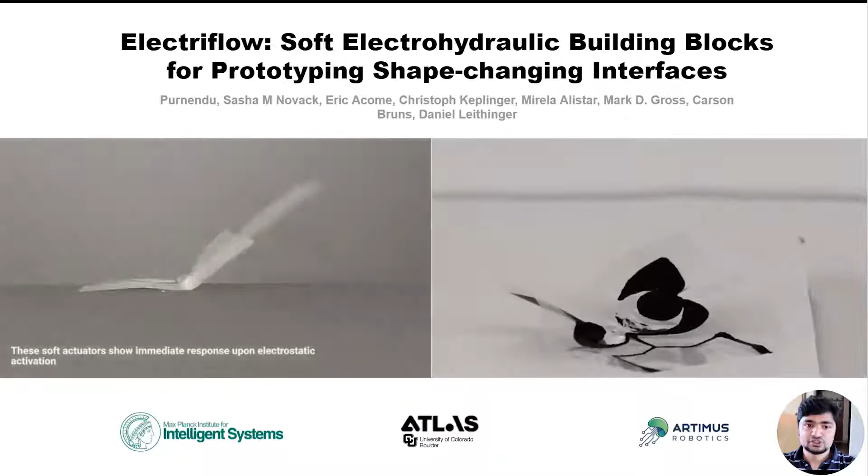Electrohydraulic mechanisms are ubiquitous in the biological world. Nature prefers electrohydraulic phenomena to drive shape change. For example, plants like Venus flytrap catch their prey through leaf closure employing electrohydraulic forces. The drastic shape transformation in certain species of octopus is a result of electrohydraulic phenomena. A pufferfish threatens a predator by filling its elastic stomach with fluid, also under electrohydraulic effects. Electrohydraulic processes drive shape change in plants and animals and augment their ability to communicate and interact.

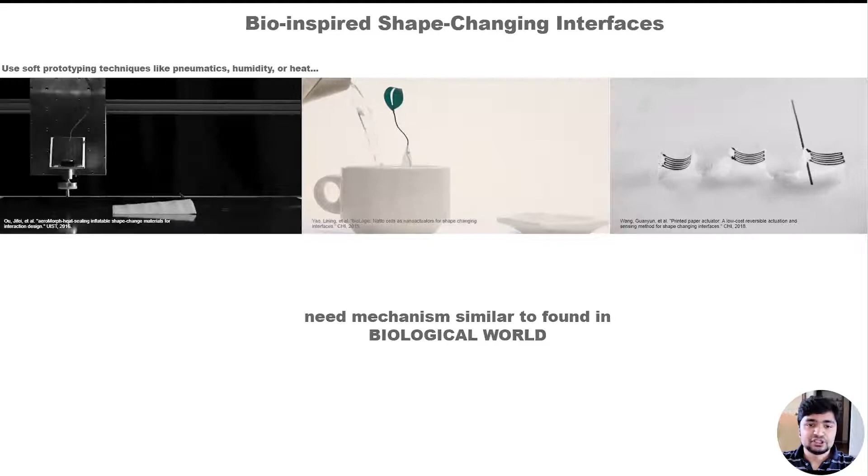In the field of human-computer interaction, taking inspiration from the natural world, bio-inspired shape-changing interfaces have been proposed. Traditionally, they are constructed out of soft prototyping techniques, which generally rely on pneumatics, humidity, or heat for actuation. But they also suffer from limitations like being bulky in terms of control system and slow in shape transformation.

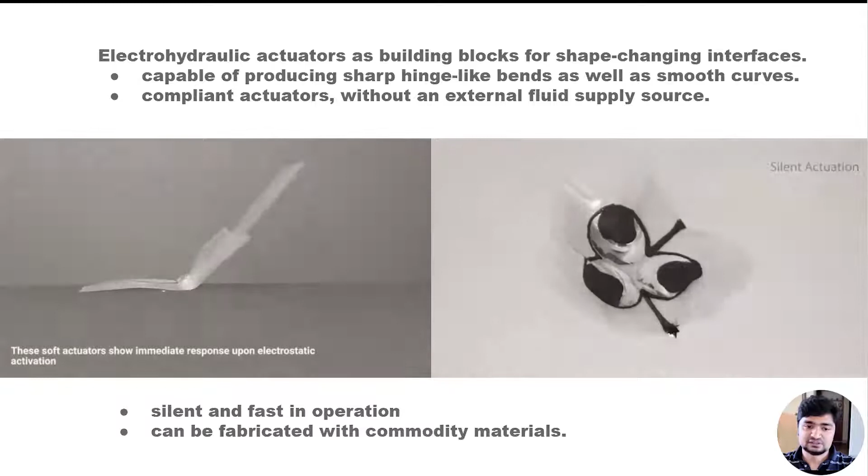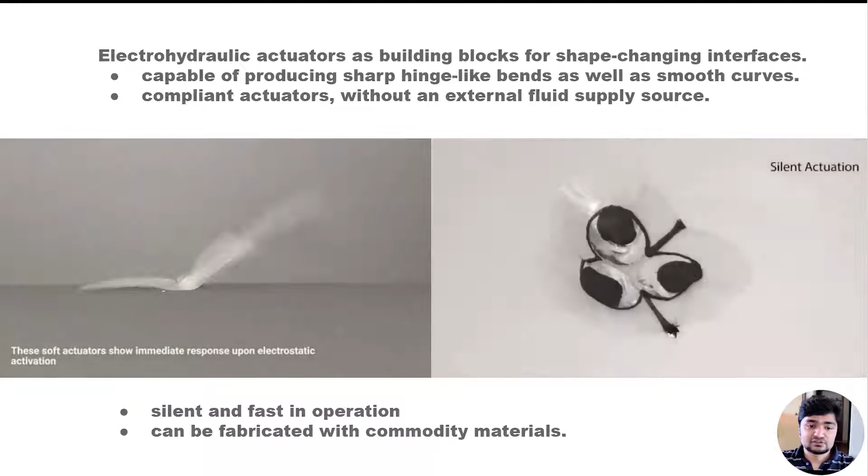In this work, we present electrohydraulic actuators as building blocks for prototyping shape-changing interfaces. These compliant actuators generate an immediate hydraulic force on electrostatic activation without an external fluid supply source. They are silent and fast in operation and can be fabricated with commodity materials.

Here, we present the general design of these actuators. It consists of oil-filled flexible pouches partially covered with flexible electrodes on both sides, as shown in figure B1. When a DC voltage of the order of 8 kilovolts is applied across the pair of flexible electrodes, they tend to zip together, shown in figure B2. This zipping motion of electrodes displaces the fluid between them to the surrounding volume, resulting in shape change, as shown in figure B3.

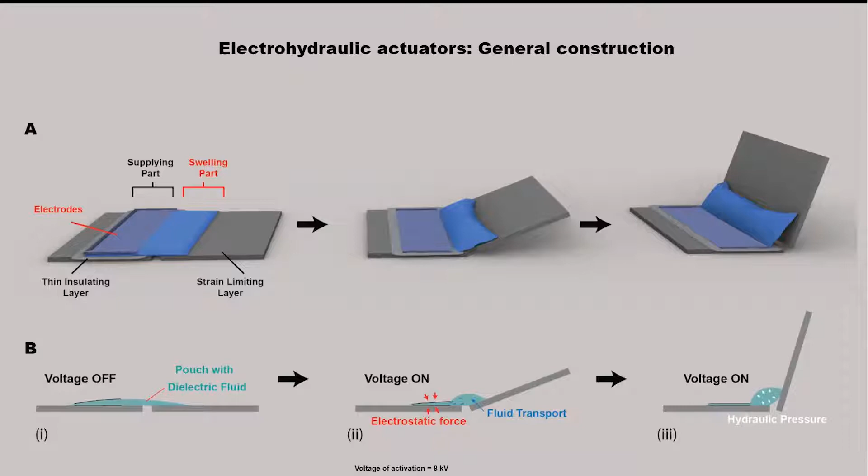These pouches are further attached with strain limiting layers to create sharp hinge-like bends. A thin insulating layer between the electrodes and the strain limiting layer is necessary for fluid failure-free operation of the actuators, shown in figure A.

These actuators can come in a variety of geometries. We propose the design of three such novel actuators: the hinge bending, the crescent, and the quarter moon. Here we show the actuator geometries along with their shape transformations.

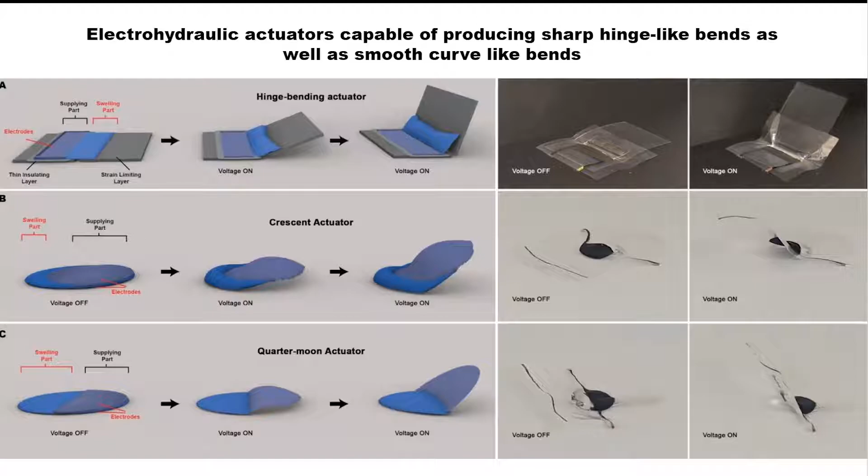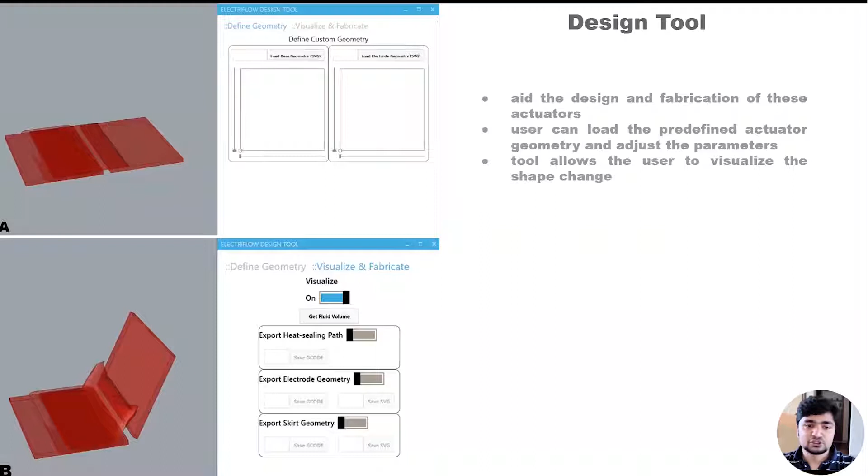We also present a design tool to aid the design and fabrication of these actuators. A user can load the predefined actuator geometry and adjust the parameters according to their needs. Afterward, the tool allows the user to visualize the shape change and export fabrication files.

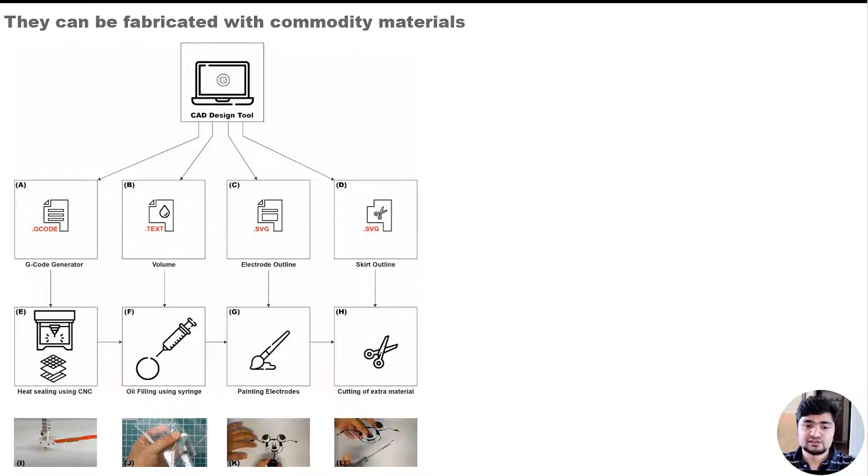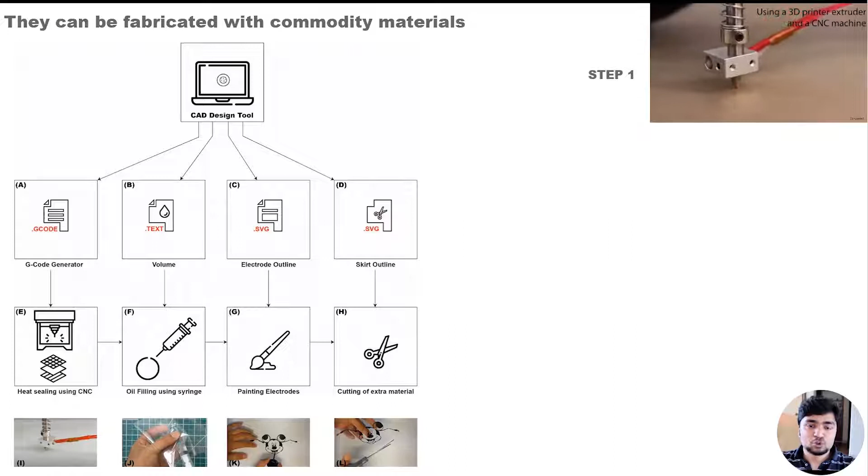These actuators can be fabricated with commodity materials and easily available tools. We begin by heat sealing two pieces of polymer sheet using a custom modified head of a CNC machine to generate the outer geometry of the pouch. We leave a small input port for oil filling.

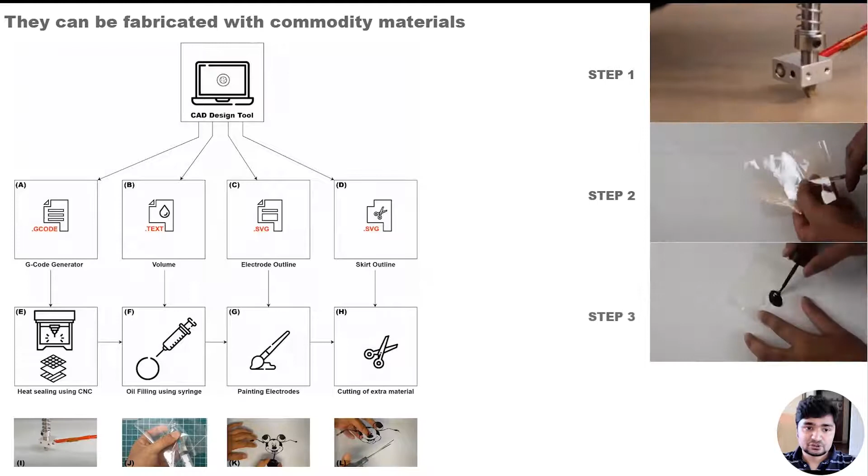Afterward, we manually fill the pouch with silicone oil using syringes and seal the input port. We then paint the flexible electrodes using conductive carbon paint and eventually trim the excess polymer sheet.

Here we show the DC power supply used to activate these actuators, powered by a lithium polymer battery similar to the ones used in smartphones these days. Though the activation voltage is of the order of kilovolts, this power supply ensures very low current consumption, making these actuators human safe.

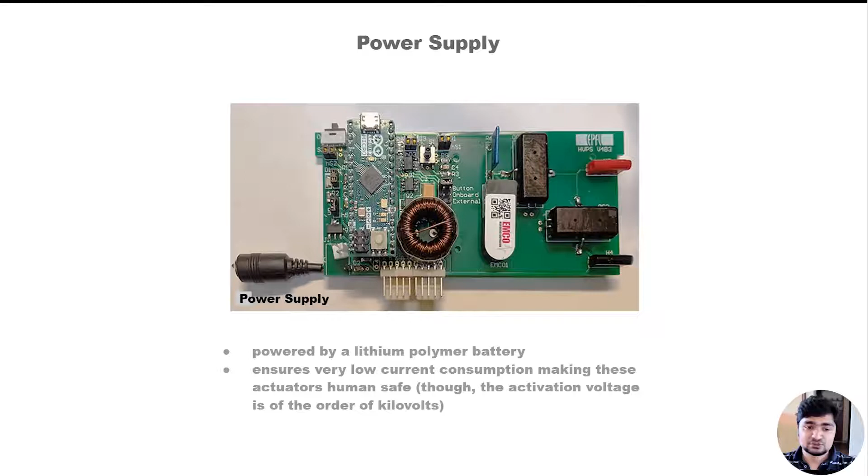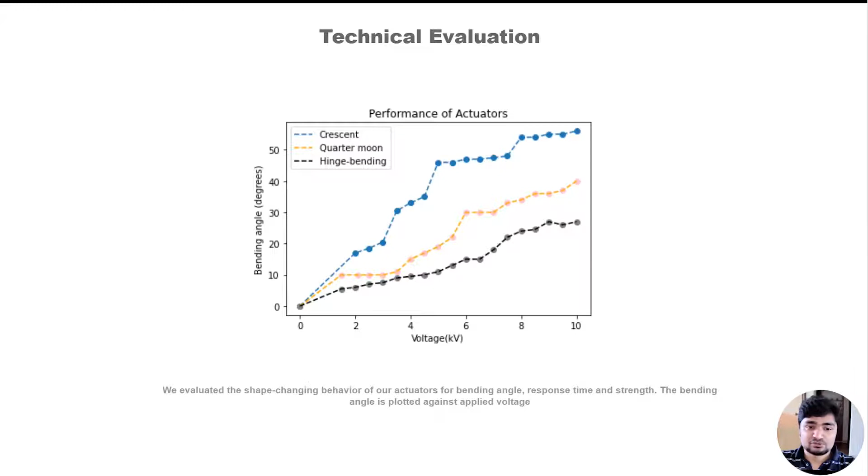Here, the bending angle is plotted against the applied voltage for each of the actuator types. A crescent actuator can produce a smooth organic bend with a maximal bending angle of around 60 degrees, while the quarter moon actuator produces sharp bends with a bending angle of around 40 degrees.

Butterflies are fascinating organisms given their ability to rapidly actuate their wings. The butterfly wings can actuate at a frequency of around 10 Hz, but for certain species of moths, it can go up to 26.1 Hz. ElectriFlow actuators can act as a great prototyping technology for design of a bio-inspired butterfly soft robot, given their compact design and high frequency of actuation.

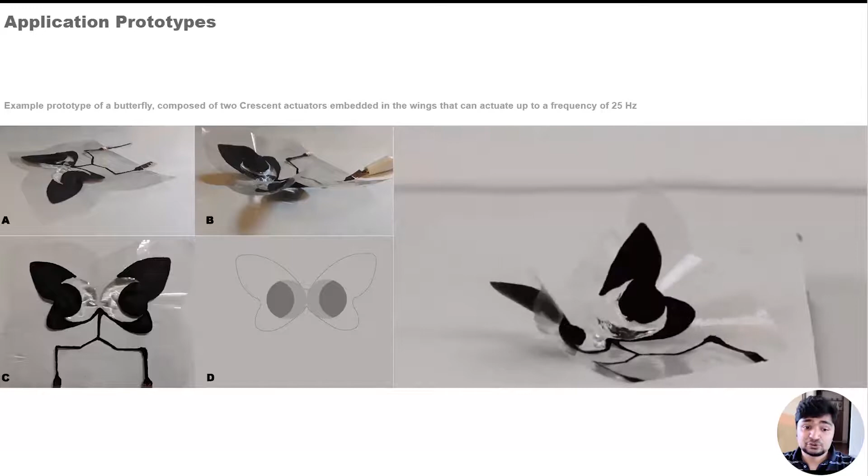Here we show an example prototype of a butterfly composed of two crescent actuators embedded in the wings that can actuate up to a frequency of 25 Hz.

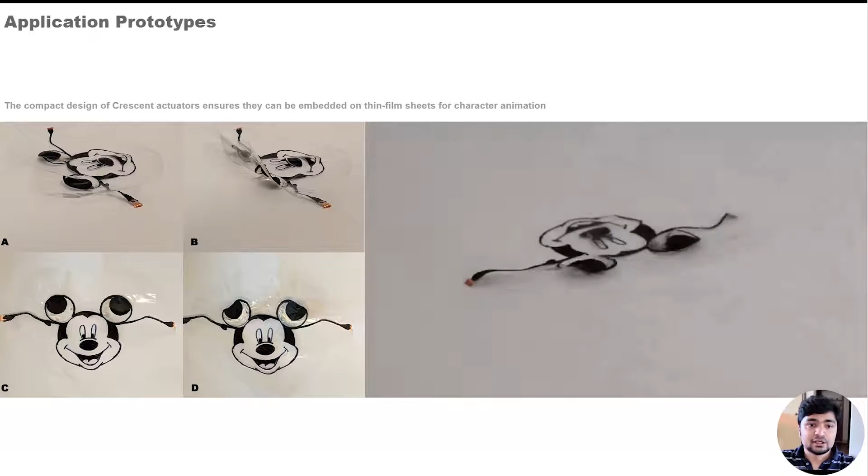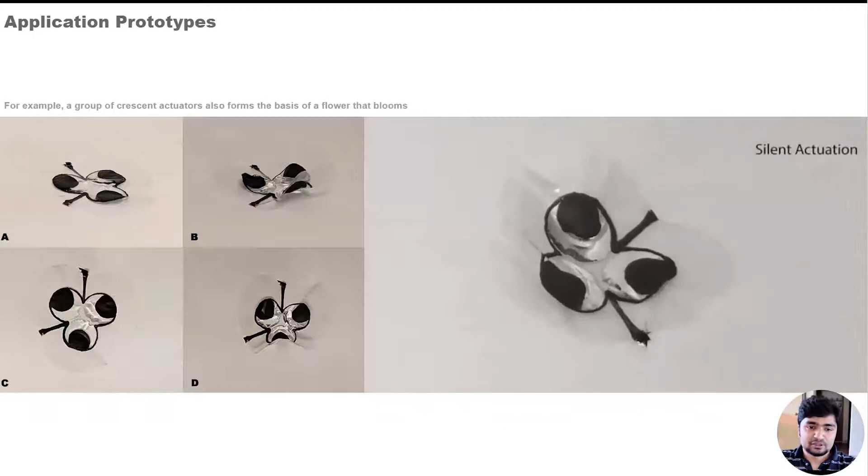The compact design of Crescent actuators ensures they can be embedded on thin film sheets for character animation. Here, each of the ears of the character has an actuator underneath. Crescent actuators can be combined in a wide variety of numbers and configurations depending upon the need for prototyping. For example, a group of crescent actuators form the basis of a flower that blooms.

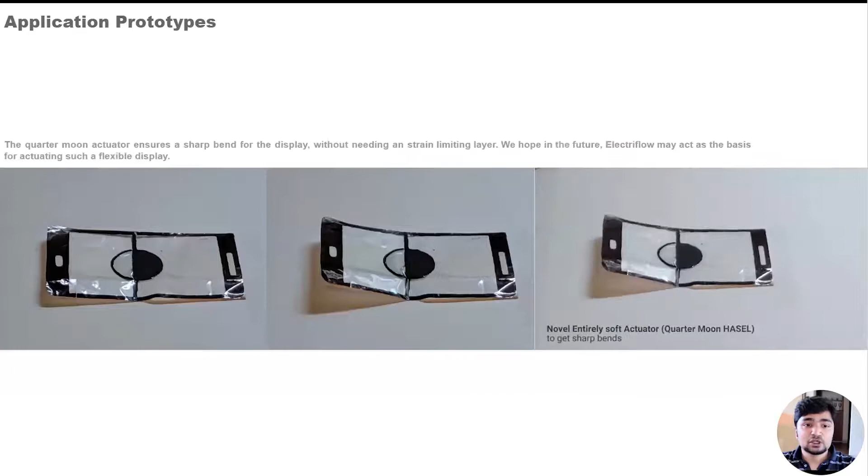Flexible displays enable new opportunities for interaction with mobile devices. To explore a thin form factor flexible display, we prototype a shape-changing mockup with the embedded bending quarter moon actuator. The quarter moon actuator ensures a sharp bend for the display without needing a strain limiting layer. We hope in the future, ElectriFlow may act as the basis for actuating such a flexible display.

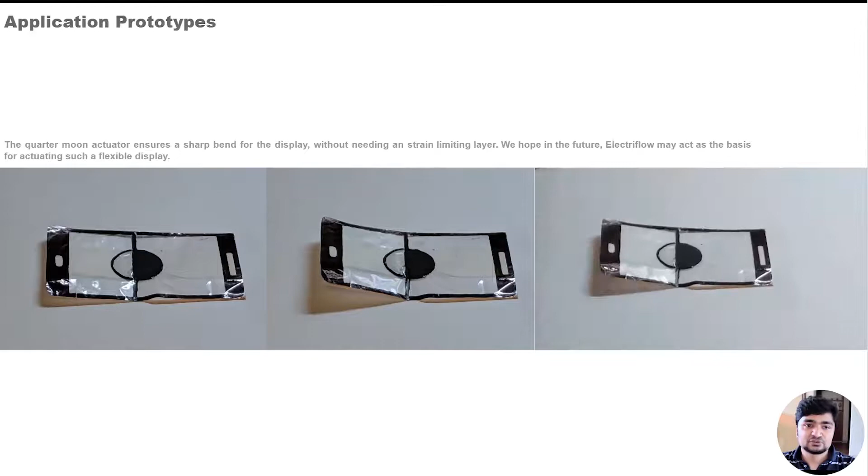The actuators can bend like a hinge and actuate light as well as heavy objects. For example, here for the hinge bending actuator, the maximum weight lifted without reduction in bending angle was 13 grams. Here we show two example prototypes: an actuating box and an actuating origami bird.

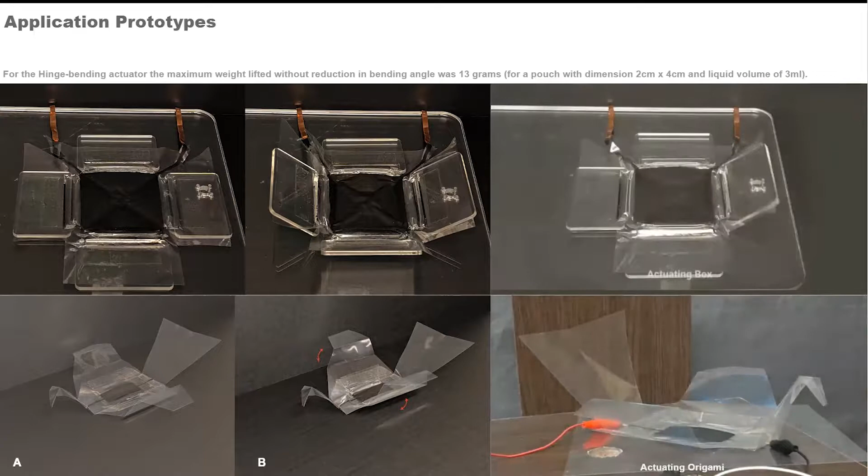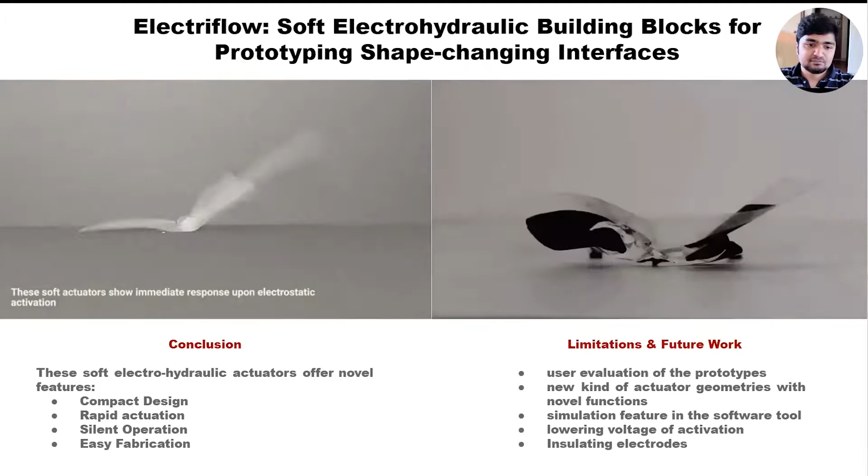To summarize, we presented ElectriFlow, a novel prototyping technology for shape-changing interfaces. These actuators offer novel features like compact design, rapid actuation, silent operation, and easy fabrication. The compactness, immediate actuation, and silent operation of these mechanisms enrich the library of prototyping technologies for shape-changing interfaces.

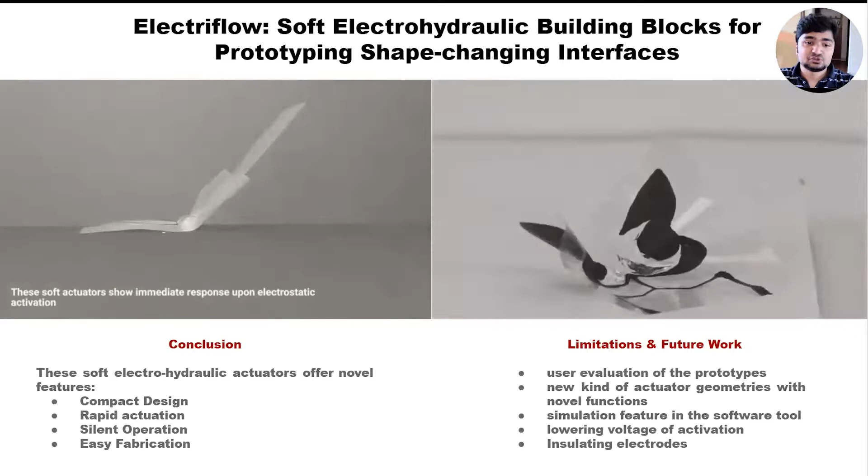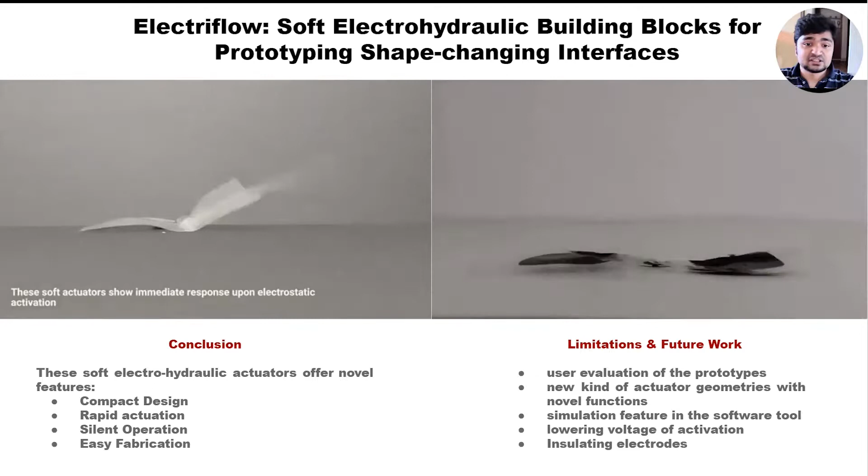During the process of developing this work, we also realized a number of limitations that open up possibilities for future work, like the need for user evaluation of the prototypes. This work primarily focused on prototyping the output of shape-changing interfaces and less on sensing the user input. Adding input sensing modalities such as embedded touch sensing would greatly increase the interactive capabilities.

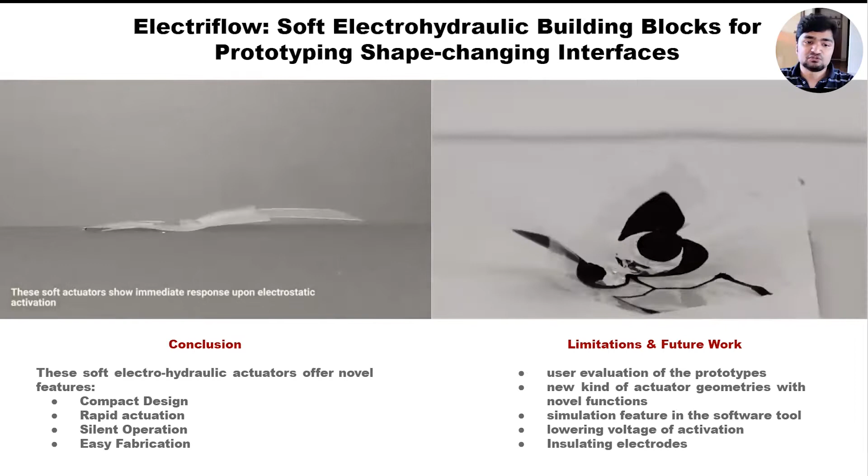We also think this work opens up possibilities for other new kinds of soft electrohydraulic actuator geometries with novel functions. There is also a possibility of adding a simulation feature in the software tool as well as lowering the voltage of activation by choosing better materials as well as insulating the electrodes.